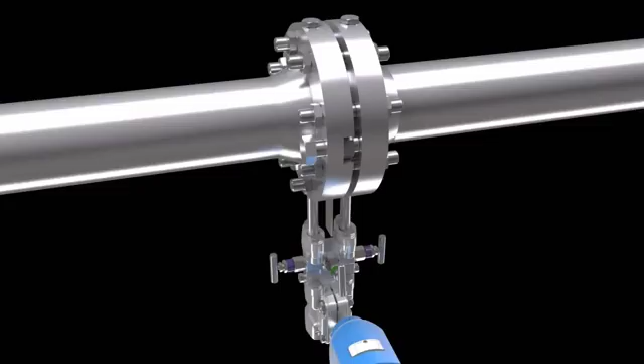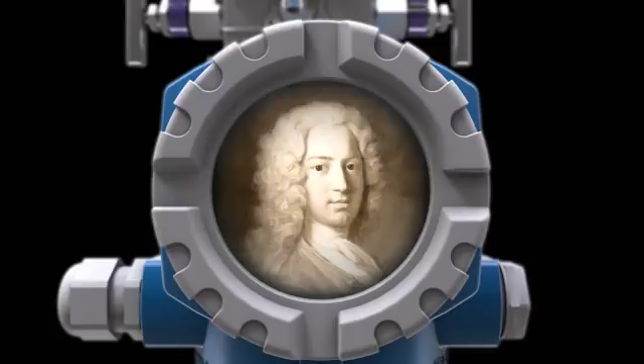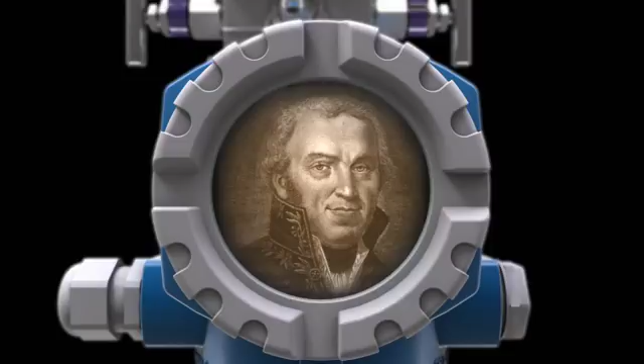One method is flow measurement, based on the differential pressure principle. Some 300 years ago, Swiss mathematician and physicist Daniel Bernoulli discovered the direct relationship between the pressure and speed of a fluid flowing in a pipe. Italian physicist Giovanni Battista Venturi also performed experiments on flow, and in 1797 he built the first flow meter for closed pipes, known as the Venturi tube.

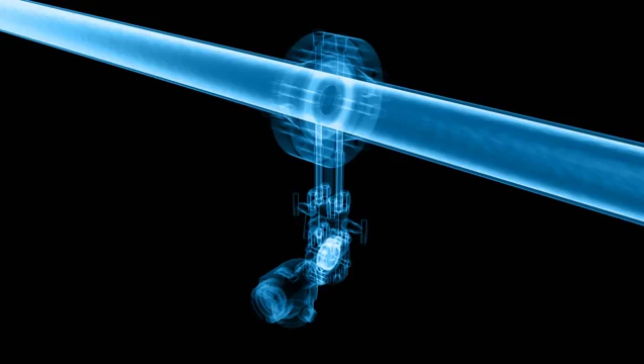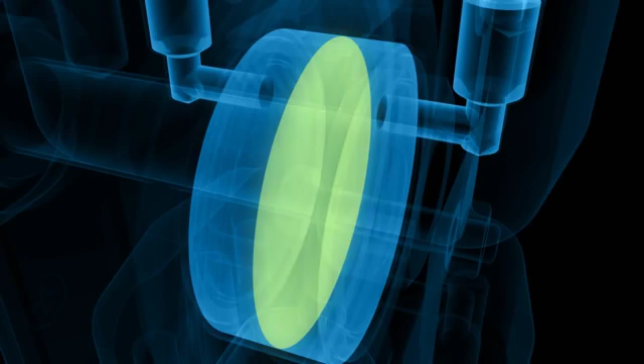Here is how this measurement method works. Differential pressure flow meters have an artificial restriction integrated into the measuring tube, illustrated here by the example of an orifice plate. Two holes are located in the pipe wall, one before and one after the orifice plate. Two separate tubes connect these holes to a differential pressure sensor with its two pressure chambers separated by a diaphragm. The tiniest pressure differences in the flowing fluid can be precisely measured.

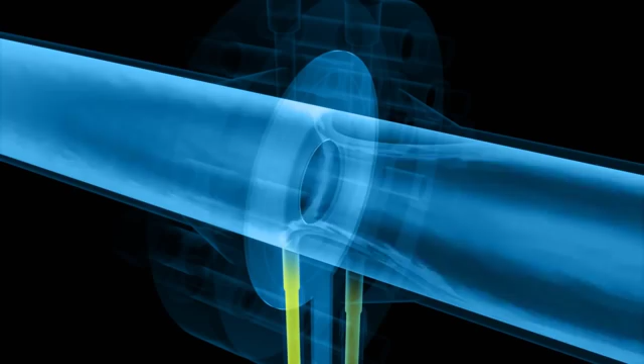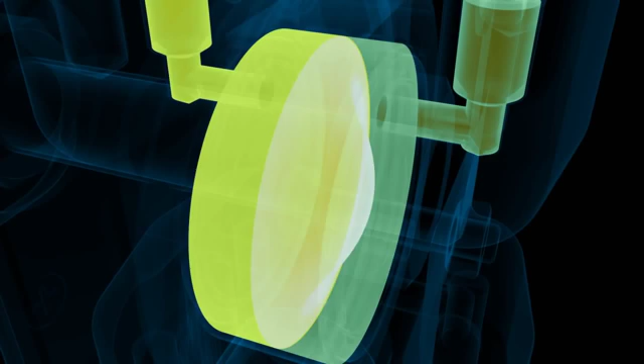If the fluid is not flowing, the pressure before and after the orifice plate is essentially identical. As soon as the fluid starts to flow, its velocity around the orifice plate increases significantly because of the restriction in the cross-section. At the same time, due to the laws of fluid mechanics, the static pressure at this point decreases. Consequently, different values are detected in the pressure chambers of the sensor, a higher pressure before and a lower pressure after the orifice plate. This pressure difference is a direct measure for the flow velocity, and thus the mass and volume flow in the pipe.

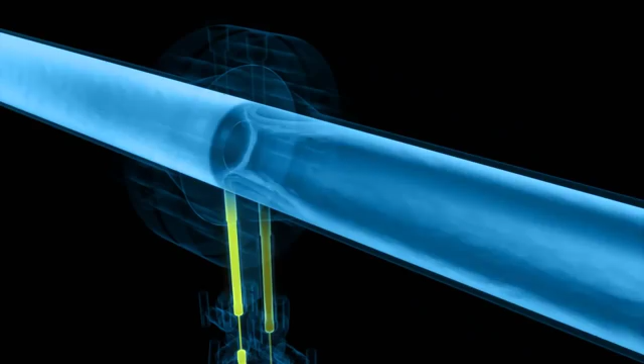The higher the flow velocity, and the resulting drop in pressure around the orifice plate, the greater the differential pressure measured. In numerous industrial applications, the orifice plate covers many needs of flow measurement technology. However, other designs are available for certain measuring tasks to minimize undesired effects, such as excessive pressure loss or abrasion of components due to solids carried in the fluid.

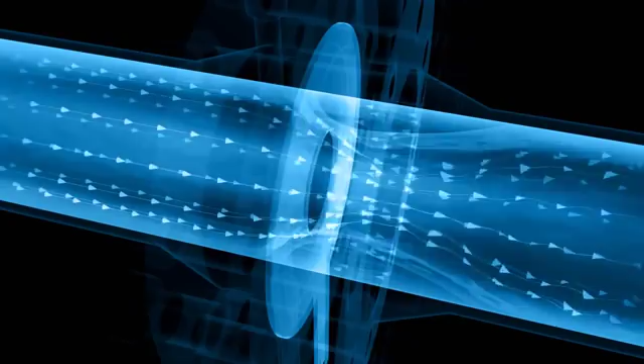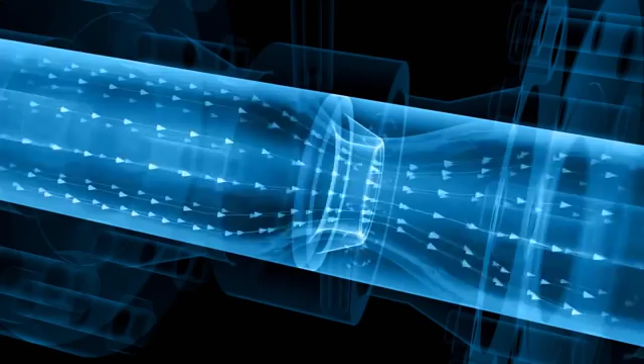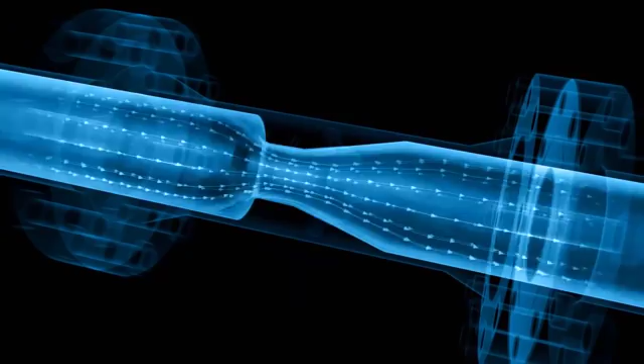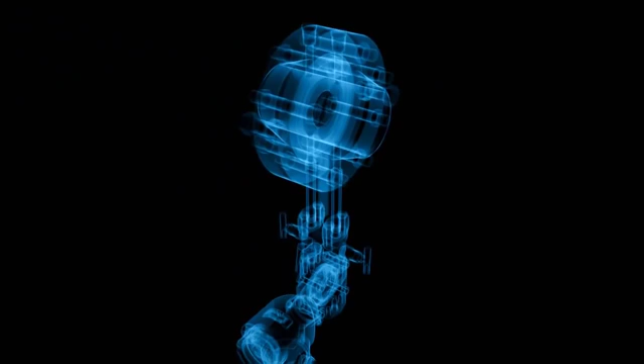This demonstration shows that an abrupt restriction generates severe turbulence in a fluid. Nozzles with a rounded, funnel-like inlet clearly reduce turbulence and thus create less pressure loss. Nozzles are particularly suitable to higher flow velocities or to fluids with abrasive solid particles. Turbulence reduction is even greater with Venturi nozzles, and finally with Venturi tubes, where the restriction is created by longer conical constrictions in the pipe wall. All these designs can be supplied with different restriction diameter sizes, so that the pressure loss and the differential pressure generated can be optimized for the process conditions.

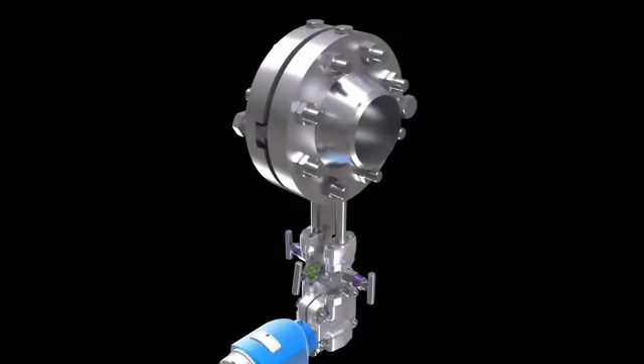Industrial flow measurement using differential pressure has been tried and tested in numerous applications worldwide for about 100 years. With this measuring principle, all liquids, gases, or steam can be measured, even at extremely high process pressures and temperatures.